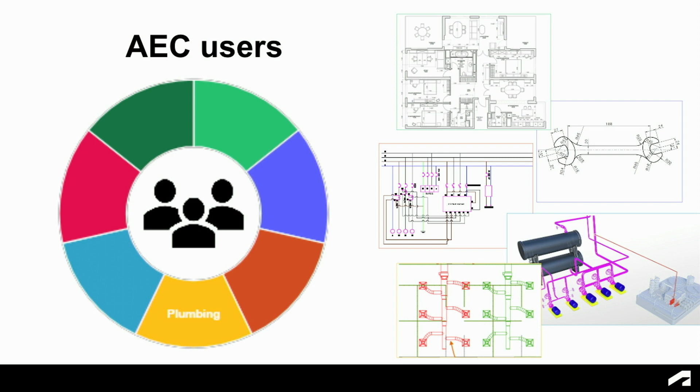Before I start talking about that, I want you to understand what type of users we work with. Our users are architects, project managers, engineers, and other professionals, and we help them create designs to build buildings or different manufacturing things, as you can see here.

When it comes to better understanding what type of drawings our users work with, I want to show you this drawing. If you've ever looked for real estate, you've probably seen similar drawings. It shows the main locations of the rooms, main objects like chairs, tables, and everything. But this type of drawing is considered relatively simple.

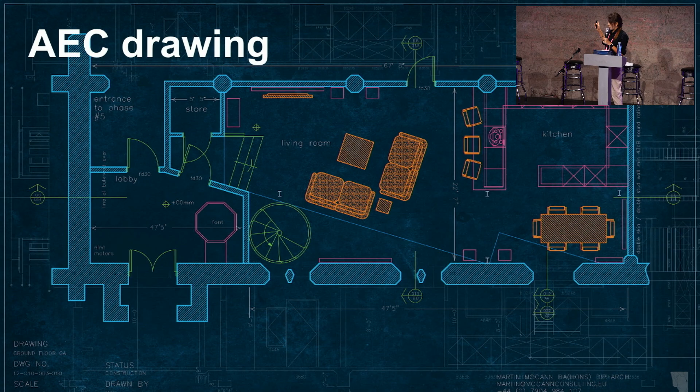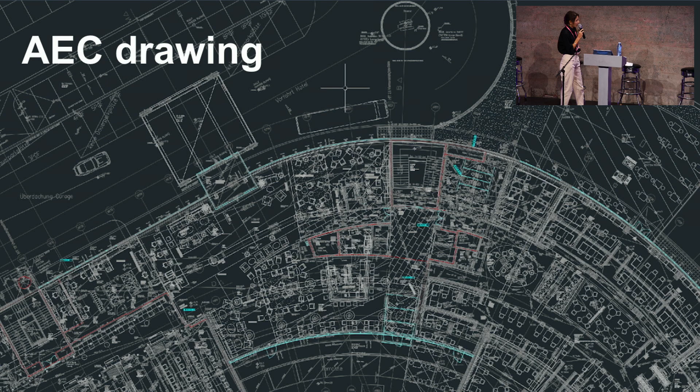Just imagine when our users have to deal with something more difficult, like this floor plan. That's getting much more complicated, right? And imagine if the user who works with such drawings, which are quite common in the industry, needs to replace or insert some of the objects there. That's getting very, very hard. Our team started to brainstorm how we can leverage machine learning and AI to simplify this process.

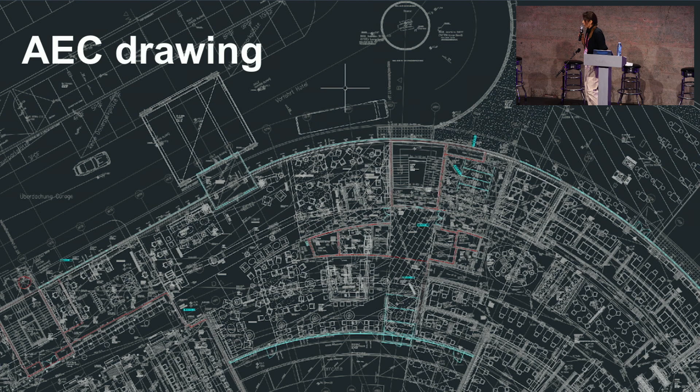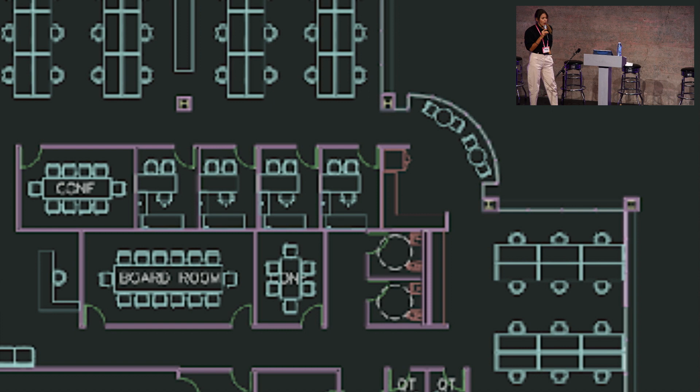Now I want to show a random snapshot from the previous drawing, which probably takes less than 1% of the entire drawing. And at least on that snapshot, I can see 5 different types of chairs. Just imagine if the user needs to replace some of them—there might be many different reasons, like manufacturing shortage or just needing to change the design.

Addressing this problem, we started to think how we can automate and optimize this searching process and enhance user productivity. And that is where intelligent workflows come into play.

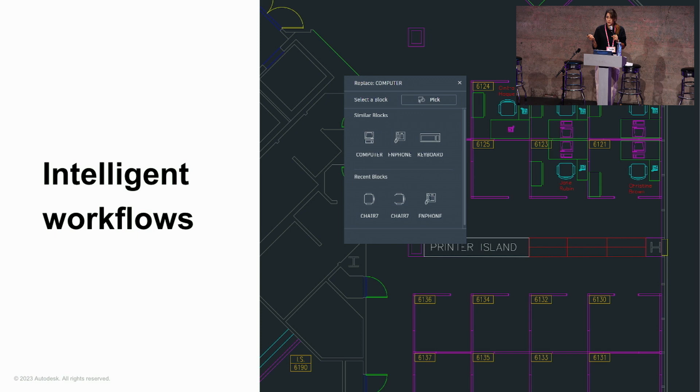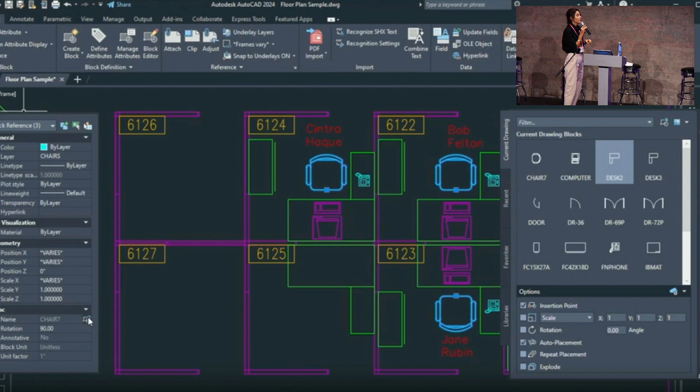Before I start talking about how we do that, I want to show you a quick demo of how actually we did it.

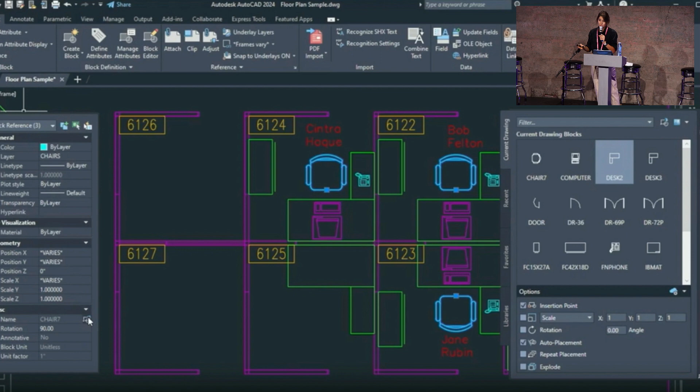What I wanted to show is that users select a random object on the floor plan and click the button, and then the tool will suggest the user similar objects, like different types of chairs. Yes, and that is how we did it.

So believe me, it works that way, and we realized that if we give this automation to our users, and users can still have full control and manage the workflow, it empowers them and saves a lot of time on common tasks, and as a result increases their productivity. Now let's dive in and talk about how we did this project.

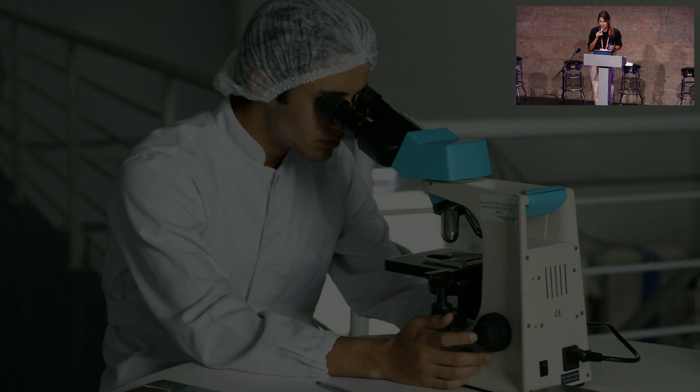Like in any other machine learning project, the first step is the user data. Remember, I already mentioned that earlier I used to work in the healthcare industry, and one of the biggest challenges we faced at that time was the lack of sufficient data. Fortunately, we have much more healthy patients rather than sick ones, but it was very tough for us to gather a sufficient amount of data to do reliable research. That is the same challenge we faced in our project too—how to collect industry-specific data.

Data collection issues are quite common for vertical AI tasks intended for specific industries. Just to refresh your memory, I want to quickly review the main difference between horizontal and vertical AI. Horizontal AI is great for general purpose tasks, making it highly versatile. Right now, there's no difficulty distinguishing cats and dogs in an image—of course there are tricky scenarios, but still it's pretty easy to do.

However, general purpose tasks and horizontal AI are not optimized for industry-specific data like healthcare or architectural industries. That is where vertical AI comes into play. Vertical AI is designed for specific industries and tasks, boasting impressive accuracy if you fine-tune your model fairly enough, making it more efficient. We realized that if we combine the versatility of horizontal AI with the specialization of vertical AI, we can create a very powerful AI system that is both efficient and flexible.

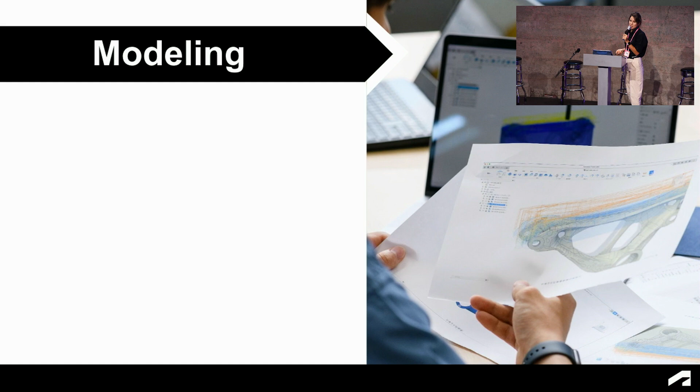And for vertical AI tasks, it's very tricky to fine-tune your model too, because they train on very general objects, and when you start to work with floor plans and architectural drawings, that data has its own specifics. Here, data modeling actually requires a lot of time.

And we did the fine-tuning, experimenting with different backbones, weights and initialization, feature fusion, and loss functions. And that is the main characteristic that helps us boost our model performance.

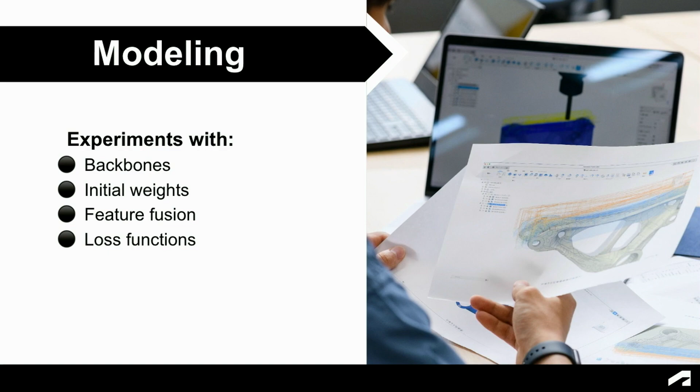As a result, we got multiple machine learning models and make suggestions, but all the time we look into our models, we ask ourselves: is the user problem solved? And to answer this question, we did internal testing as well as customer interviews, where we ask all the time how this machine learning model works and everything.

And as I mentioned at the very beginning, we still continue to label our data and collect more and more to make our model less biased.

And here we come to the model deployment. And as many young professionals think, that is the last step - when you train your model, it's done. Actually, not. When we do the model deployment, it's not the end of your machine learning process.

And after you deploy your model - here I want to switch a little bit and talk about gardening. I don't know how many of you garden, but actually gardening is very similar to the machine learning process. You need to plant your seeds first, right, and nurture them to grow into vibrant plants. But however, your process doesn't end there. As the seasons change, you really need to water your plants and prune them. And that is the same thing happening when you develop your machine learning model.